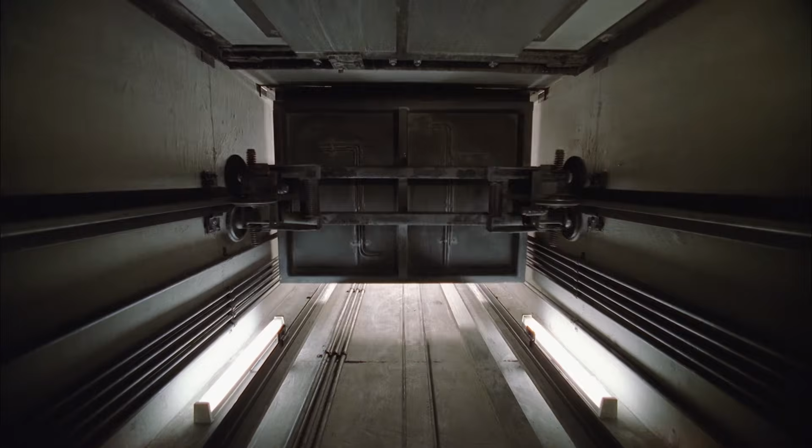But if the sky is the next frontier for human life, this raises a crucial question. Are tall buildings as safe as they could be? And if not, oh my God, how can we make them safer? Right there. There have been horrific blazes in tall buildings here and across the globe. When there's a fire, one thing that unites rich and poor, they all die the same way.

Outside the U.S., earthquakes have felled tall buildings and killed indiscriminately. Could cities like San Francisco be next? It's not if, it's when. Shut off the gas! Shut off electricity! And some tall buildings may go down. That is what our modeling tells us.

Can the latest generation of tall buildings meet these and other challenges, even as we build more of them? Skyscrapers today, especially the tallest ones, are very safe buildings. But mistakes can still happen. Downtown high-rise sunk 16 inches.

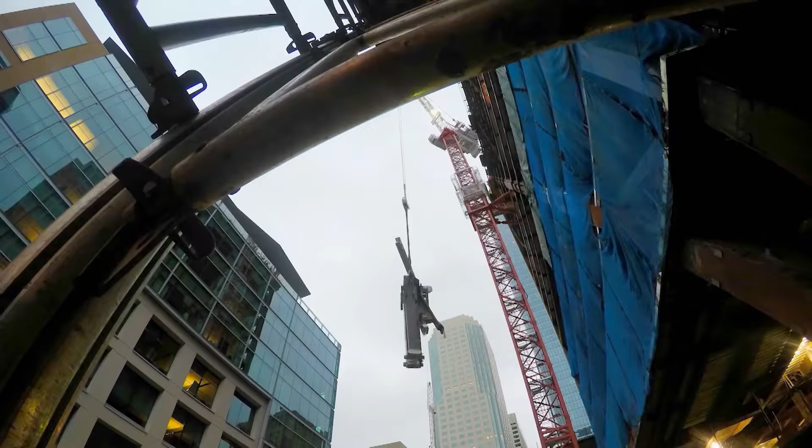And beyond making them safer, is anyone making them more appealing? We want a different model for organizing office buildings with constant movement, flow, and interaction. It's just an amazing building. Few structures in the modern era have had a greater impact on the way we live or work. And now the question is, can we make them even better? High risk, high rise, right now on Nova.

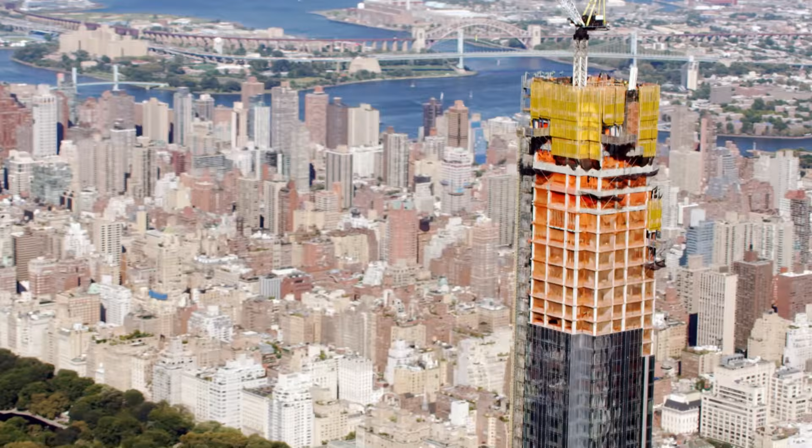Skyscrapers are among humankind's most awesome and extravagant achievements. Engineering marvels so tall and strong, their very existence seems to defy the laws of physics. The most daring skyscrapers are essentially showpieces designed to attract elite businesses or wealthy homeowners. Architecturally, these tallest of the tall exhibit the extreme of what is possible.

But it is tall buildings of all sizes that are today filling many of the world's cities. And for good reason. United Nations statistics show that there are almost 200,000 people urbanizing on this planet every day. And the only true way to address it is going up in height. If you build taller, you could pack more people onto the same address.

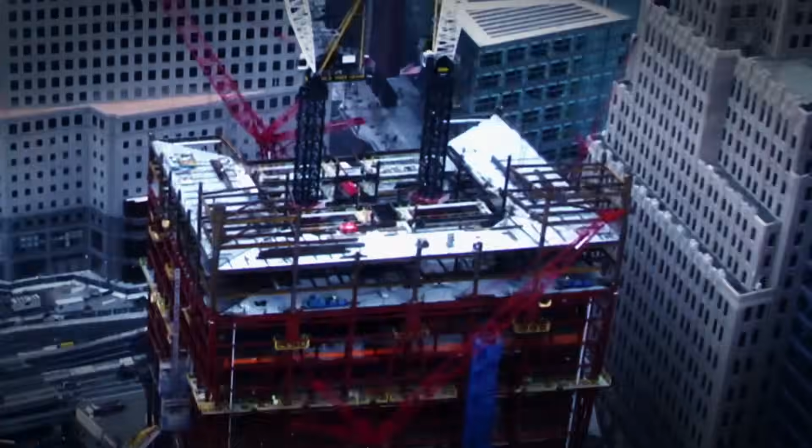Without tall buildings, it would have been virtually impossible to accommodate urban population surges in Asia and the Middle East. You see in countries like China and India, cities which have gone from 2 million to 20 million in one generation. And so that certainly generates a need for building stock to house that density. In the U.S., the pressure to build tall is centered in cities benefiting from the uptick in the global economy.

But as most major cities become crammed cheek to jowl with tall buildings, as we spend more of our lives looking down on the world below, will we begin to lose our sense of place, of neighborhood, of community? Or can tall buildings begin to embrace a more humanistic vision, one that stresses livability, interactivity, and eco-responsibility? Some designers are certainly trying new ideas.

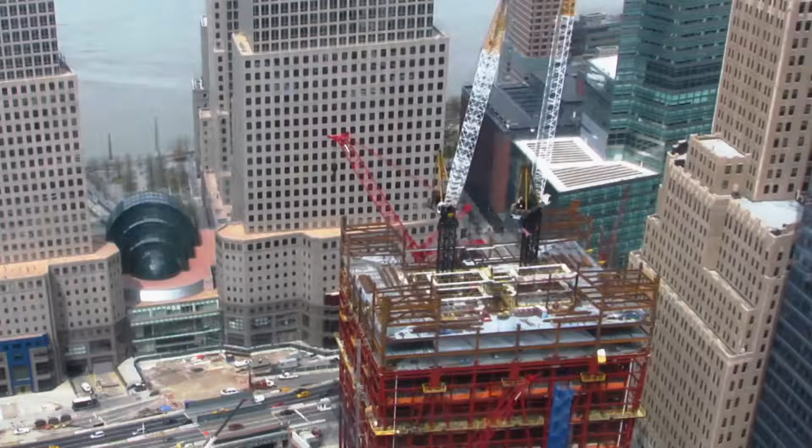But as we build skyward at a staggering rate, there's a more basic question. What have we learned over the decades about making tall buildings as safe as they can be? Can we ultimately trust them with our lives? Many American cities are identified by their iconic skylines, and seeing new skyscrapers join older ones seemed inevitable, right up to 9/11. After 9/11, most people said this is the end of the skyscraper, that people will be too afraid to live in them.

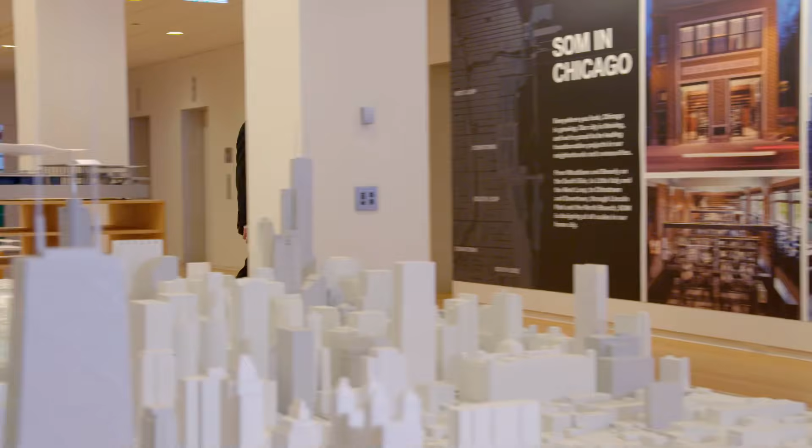They'll be too afraid to work in them. Certainly many people in the profession believe that it'd be the death of the tall building. Even Bill Baker, one of the world's foremost tall building engineers, had his doubts. I thought that my specialty was over, that it was going to be the end of tall buildings. And then, quite remarkably, soon thereafter, I was designing the world's tallest building.

That building is the Burj Khalifa in Dubai, largest city in the United Arab Emirates. As the world's economy began to rebound after the financial crisis of 2008, the drive to build tall in wealthy urban centers became a global trend.

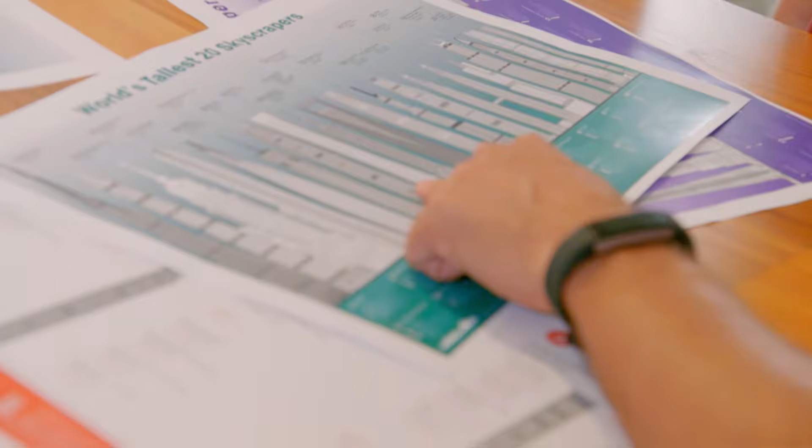Let's be clear on this, there's been an explosion of the number of tall buildings around the whole world being built. Anthony Wood heads the Council on Tall Buildings and Urban Habitat. They showed tallest 20 in 2020, which we did about 6 years ago. The organization charts the rise in tall building construction and classifies the world's tallest skyscrapers in 3 categories.

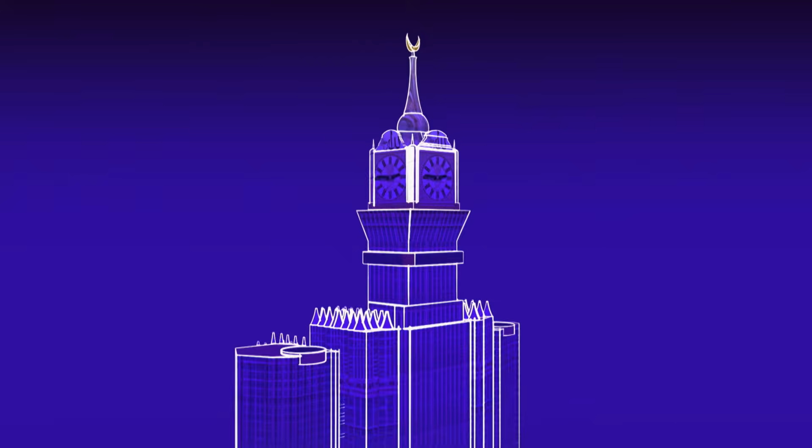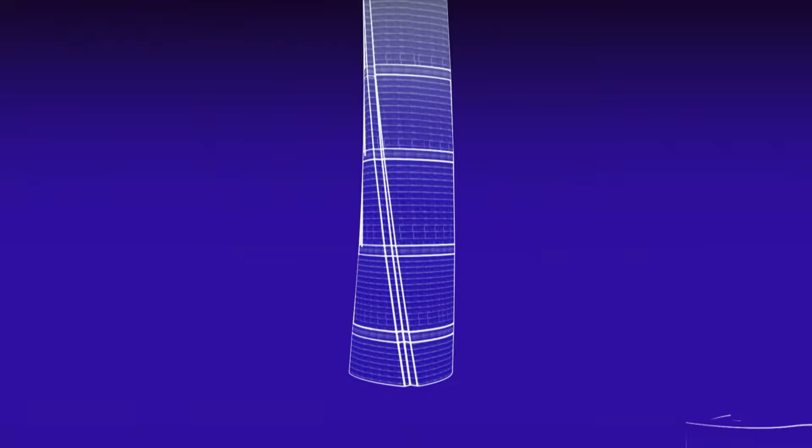There's plain tall, up to about 1,000 feet or the size of New York's Chrysler Building. Super tall, buildings over 1,000 feet. And mega tall, buildings over 2,000 feet or the size of the Mecca, Saudi Arabia clock tower. As of 2020, there are only 2 other mega talls, the Shanghai Tower at 2,073 feet and Dubai's Burj Khalifa at a staggering 2,700 feet. That's more than twice as tall as the Empire State Building.

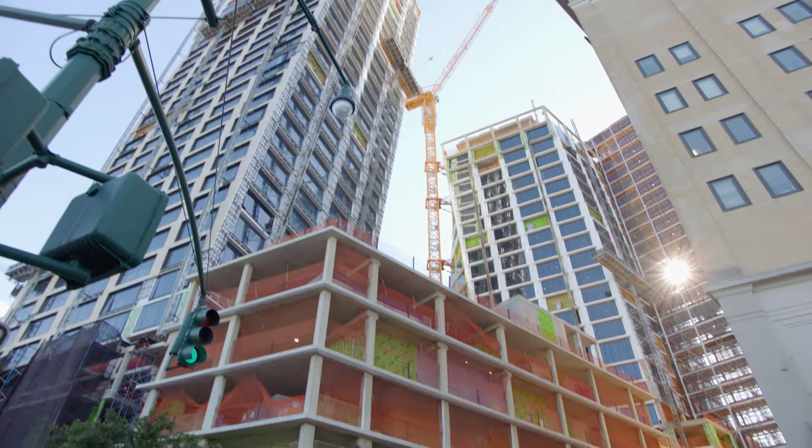I often get asked, what are the biggest barriers to how tall we can go? And there's only one barrier, and it's not technological. It's financial. It's who is gonna pay for it. Some of the very tallest buildings are designed to bring tourists and prestige to the cities they tower over. But most building owners aren't seeking height records. They're seeking profits. To build the tallest building in the world is not necessarily to build the world's most profitable building. That tall buildings can be good investments is evidenced by the number of cranes sprouting up in many major cities.

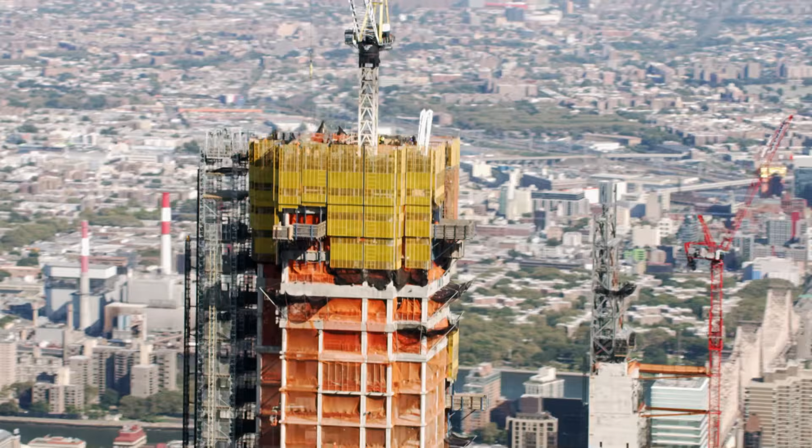Their proliferation also seems to indicate that few people question tall building safety or think twice about living or working in one. And for the most part, tall buildings do have stellar safety records. But engineers and designers are not infallible. And some threats can be unpredictable and difficult to overcome, like fires. Although most fires occur in homes and low-rise apartment buildings, frightening skyscraper fires do happen, as recent blazes in China and Dubai so clearly demonstrate.

In the U.S., fire started on the 12th floor of the Interstate Bank Tower. Huge multi-story skyscraper blazes are fairly rare. But fires in mid-sized buildings, especially older apartment-type blocks lacking basic fire safety requirements, are an ongoing concern. An egregious recent example of this problem occurred overseas at the 24-story Grenfell Tower in London. The fire started in a kitchen where flames shot out a window, igniting the building's highly flammable exterior wall covering, or cladding. Because of this danger, flammable cladding is prohibited in the US, but not at the time in the UK.

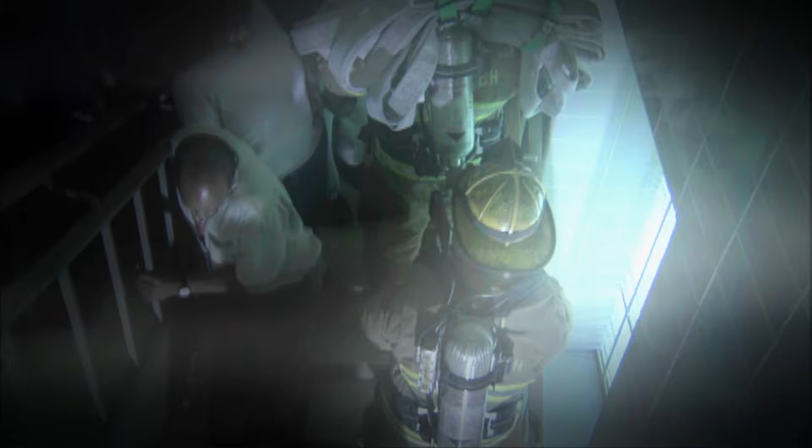And many stairwells are narrow, creating a dangerous bottleneck for firefighters trying to reach and control the blaze. We do have some narrow stairways, so either the people coming down are going to get held up or the firefighters going up are going to be slowed down.

Adding to this challenge is how to get elderly or disabled people down to safety. That becomes a problem if we have to take them down. That's very intensive to move somebody down the stairs. And that's why our best advice is we want them to shelter in place in their apartments.

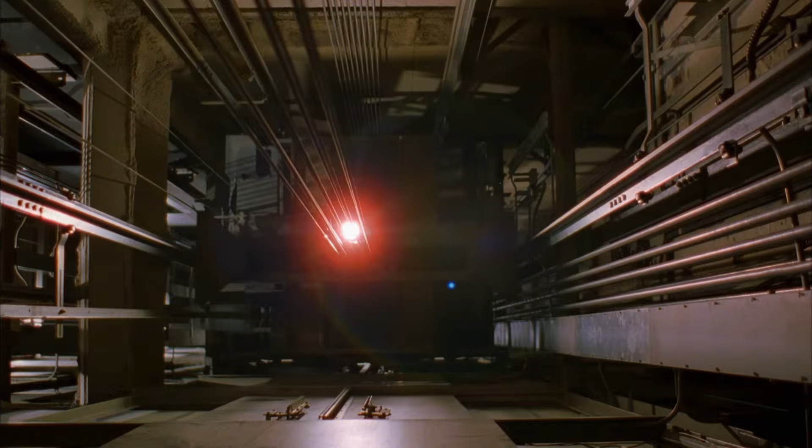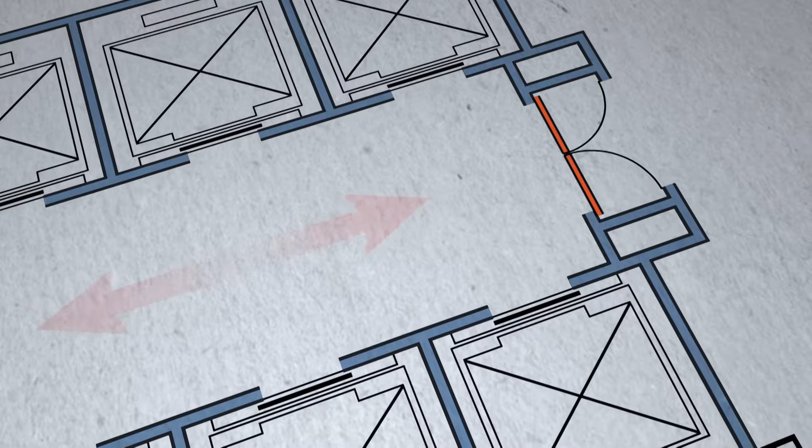Elevators could help, but they can spread fire or smoke, and people can get trapped inside. So occupants are generally restricted from using them. A new generation of fire-safe elevators is starting to come online, and these would certainly help the aged or disabled. They are housed in special closed-door areas, pressurized to keep smoke out, and there are drains to keep water out.

They hold great promise. But there are so few operating in the U.S., they have yet to be fully fire-tested. So we don't know the effectiveness of those elevators until they're actually used in an emergency situation. But there is a proven technology that can avoid the need for elevators by keeping most fires from spreading.

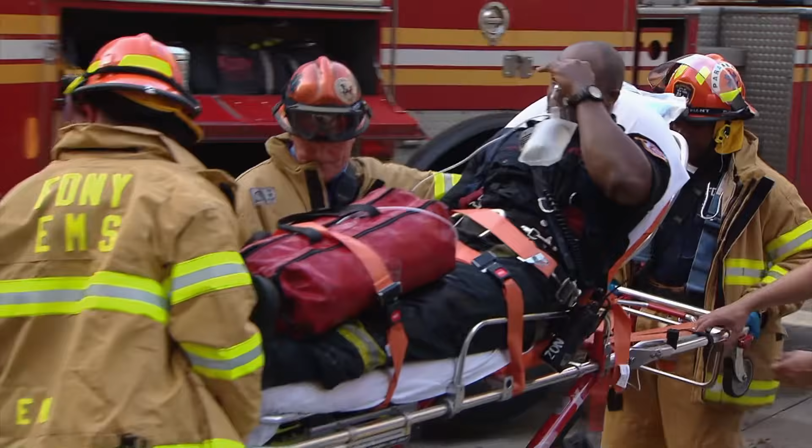That sprinklers have the capacity to save lives and buildings has been proven time and again, even at high-profile addresses. A recent fire in Trump Tower, New York, built before sprinklers became mandatory there, resulted in the death of a resident and several injured firefighters. Sprinklers could have prevented these casualties. So why don't more buildings have them?

And the reason we don't have sprinklers in all tall buildings is because the real estate industry doesn't want to spend the money to put them in. The good news is, sprinklers are now mandatory in most recently built tall buildings. And these have helped keep fires and fire-related fatalities on the decline.

But fires aren't the only threats to tall buildings and their occupants. Despite a mostly excellent safety record, (Everyone get back, get back!) engineering or construction mistakes do happen. (Oh my God.) And when they do, the results can be terrifying.

This is San Francisco's Millennium Tower, a 58-story luxury condominium that became a much sought-after address when it first opened about a decade ago. But in 2016, the news broke that it was sinking and tilting. This 58-story downtown high-rise unexpectedly sunk 16 inches. This golf ball rolling down the uneven floor toward the direction the building is leaning.

The revelation came as a shock to condo owners. The building was still settling vertically and horizontally, and it was unclear when that would stop. Some people, I think, just left. There was a concern that the building was about to topple over. And in a city with a history of earthquakes, this was especially worrisome. Today, the so-called Leaning Tower of San Francisco has sunk about 18 inches on its northwest corner.

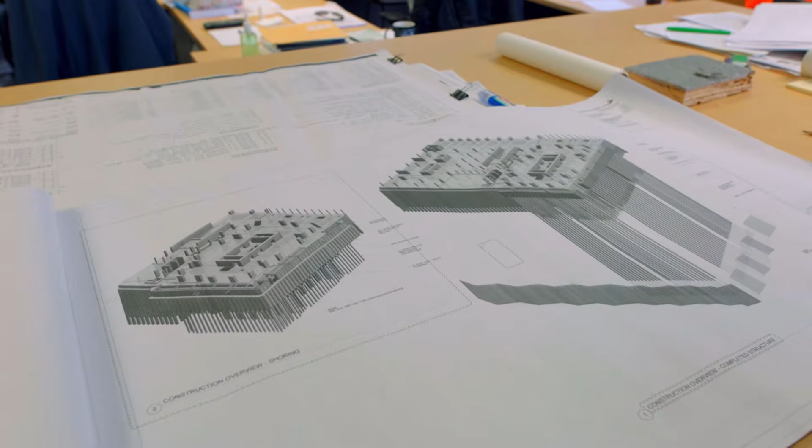When the news broke, Ron Hamburger, a veteran structural engineer, was hired by the building's developers to find out why the Millennium was sinking and if it could be stopped. The Millennium Tower basically is sinking because it's a taller building and a heavier building than most of the other buildings that have been constructed in San Francisco. It imposed greater weight on the sand layer that exists about 80 feet below the sidewalk.

Like many cities bordering water, San Francisco rests atop ancient layers of soft sand and clay. Whereas in New York, a hard bedrock-type layer called schist lies close to the surface in many places, so anchoring tall buildings here is ideal. But in San Francisco, bedrock lies deep below the surface, and reaching it with supporting piles is difficult and expensive. So tall buildings are often placed on concrete mats with piles that don't go to bedrock.

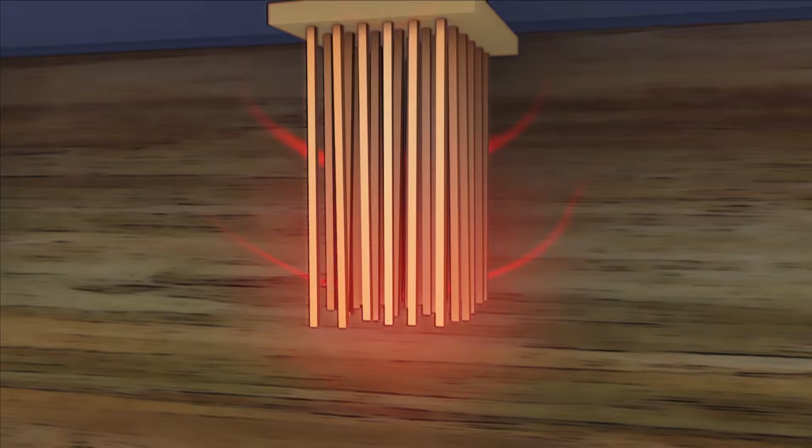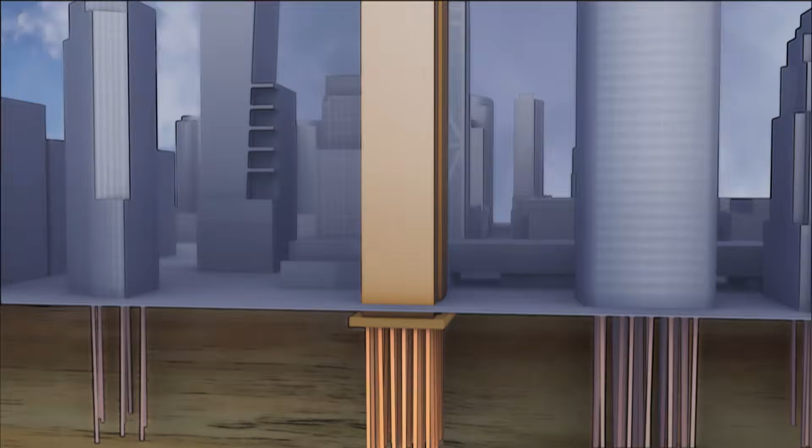But the piles do transmit the building's weight through the weak upper soil layers to deeper, firmer layers, and the system normally works quite well. But for some reason, the Millennium's extreme weight pushed down with enough force to compress the soil under some of the piles, causing the building to settle unevenly.

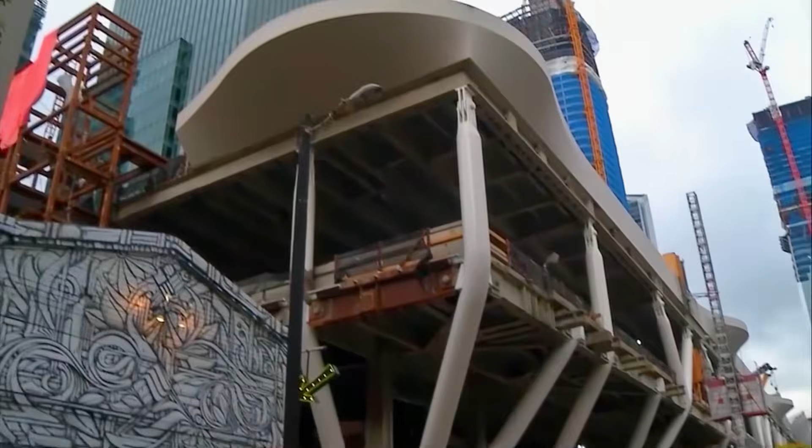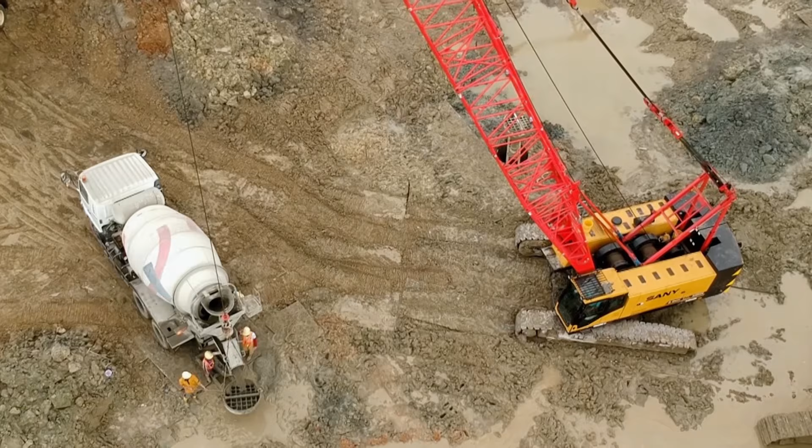The tower's owners claim a neighboring construction project called the Trans-Bay Terminal contributed to the uneven settling by dewatering the soil under the Millennium. The dewatering is done in order to have a dry excavation so that you can actually build what you want to build. Whether the fault was dewatering or poor engineering, the sinking has slowed to about 1/4 inch a year and could stop entirely.

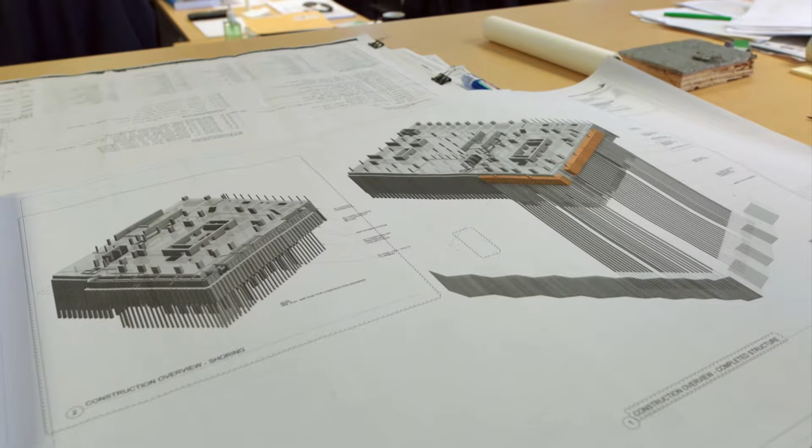Regardless, Ron Hamburger is now heading up a multi-million-dollar foundation fix that will shore up the building by extending the concrete foundation mat on the sinking corner and adding additional supporting piles that go all the way to bedrock. It is hoped that the fix will allay public fears about the building's stability.

The Millennium Saga stands out in part because serious mistakes in high-profile buildings are rare. Their engineers have consistently produced structures that stand straight, can support their own weight, and are capable of resisting a constant threat to any tall building: the force of the wind.

Although no tall buildings of note have ever been blown over, another famous mistake almost brought that frightening prospect to New York. When it was completed in 1977, the now modest 59-story Citicorp Center was the 7th tallest building in the world. With its aluminum and glass exterior, Citicorp was among a new generation of lighter skyscrapers that avoided the expense of heavier masonry-clad facades, like the Empire State Building.

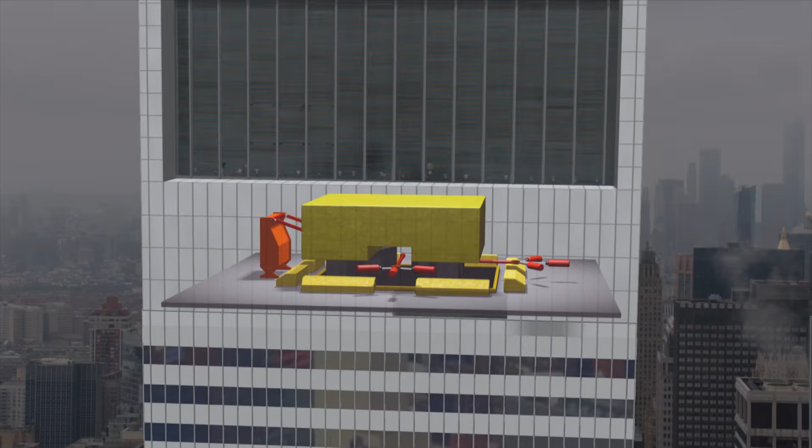But lighter buildings can sway in the wind, and when they do, people inside often complain about feeling motion sickness. To counter the sway at Citicorp, the building's engineer, William LeMessurier, had New York's first tuned mass damper installed near the top of the building. It is basically a 400-ton block of concrete that slides on a bed of oil.

When wind pushes against the outside of the building, the giant block will slide in the direction of the sway. Large piston-like devices restrain the block, absorbing the energy and slowing its movement. This makes the block lag behind the moving building, which in effect counters the sway and keeps the building steady.

Without dampers, tall buildings like these beanstalk-thin luxury condos could be fairly uncomfortable to live in. The building can't have the reputation of having the kind of proverbial waves in the toilet where you can feel the building moving, because people then feel uncomfortable. They won't buy an apartment where they feel vulnerable.

Back at Citicorp, the resourceful LeMessurier solved another problem. He raised the building above the street and placed its 4 major support columns under its sides, rather than at the corners, as is typical. He did this to accommodate a church. Not this modern one, but an older one that had become dilapidated. So the church struck a deal. They would get a new building in exchange for letting Citicorp rise above it.

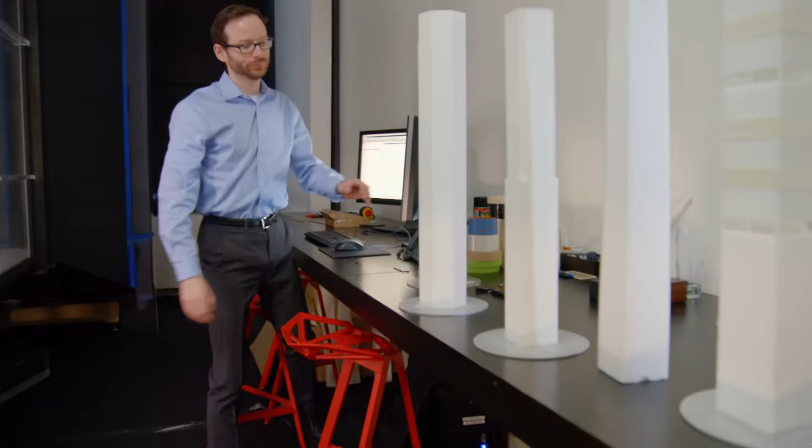Engineers wind test building models to see, among other things, if their shape produces a dangerous phenomenon called a vortex. The model is bolted to a base that contains sensors underneath, and when the fans come on, the sensors measure the model's response to the air flowing around it. One of the issues with tall buildings is called vortex shedding. As wind goes past an object, it'll go first to one side and then the other. And when it does this, it'll create little swirls in the air.

Vortex shedding creates whirlpools that lower the air pressure behind a building. Now, when the wind hits the building, it can push it and make it sway rhythmically, like a child on a swing. At first, they kick their feet just randomly and the swing goes nowhere. You have to teach them that they have to kick their feet at the natural harmonics of the swing. So in a tall building, it's the same thing.

Buildings that gain momentum like a swing put dangerous pressure on structural connections. But changing the building's shape can disrupt wind forces and stop the buildup of vortices. Sometimes a very small change can be the difference between a building being successful or not successful.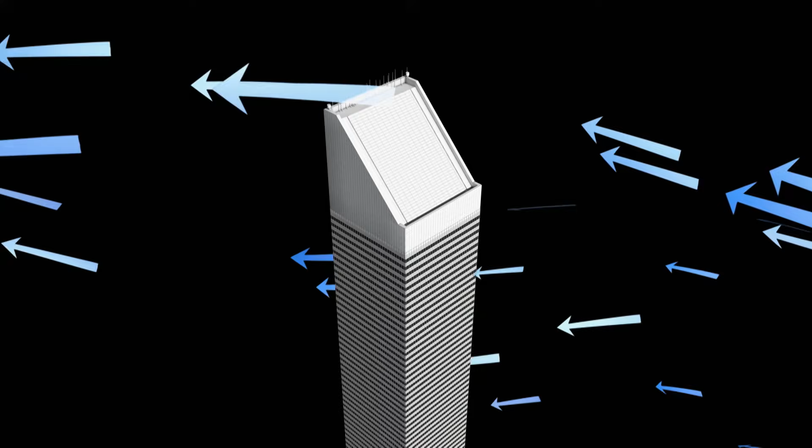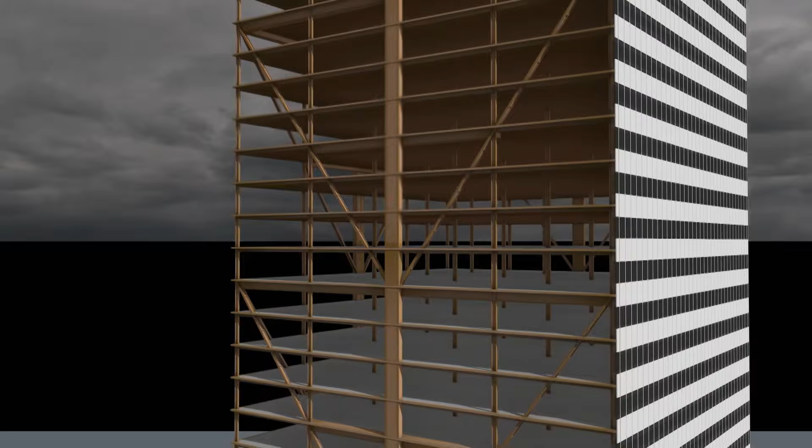Citicorp passed its wind tests, but about a year after it was occupied, LeMessurier discovered that winds striking the building diagonally, rather than face on, could increase the stress on some of the V-braces by 40% or more. Then he realized that during construction, his office had permitted contractors to bolt the braces together instead of welding them, as he had originally specified.

He calculated that winds in excess of 70 miles per hour, striking the corners of the building, could sever the bolted connections. I came to the conclusion that a storm which had a probability of occurring once in 16 years would cause the building to fail and collapse. I can't live with that. LeMessurier recommended welding 6-foot-long steel plates on either side of the bolted connections to strengthen them. This would certainly solve the problem, but would take weeks to finish.

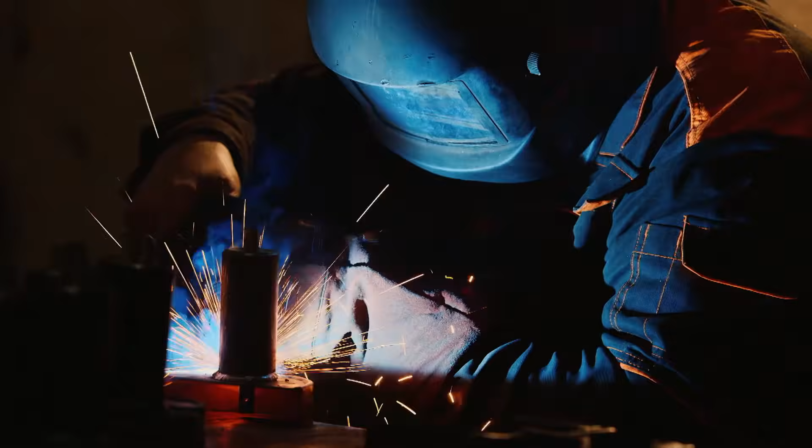So as workmen began the arduous task, folks, get on the sidewalk, please. The city drew up emergency evacuation plans. Not only would they evacuate the building, but they would evacuate a 10-square block area around the building just in case the building falls over. Can you imagine?

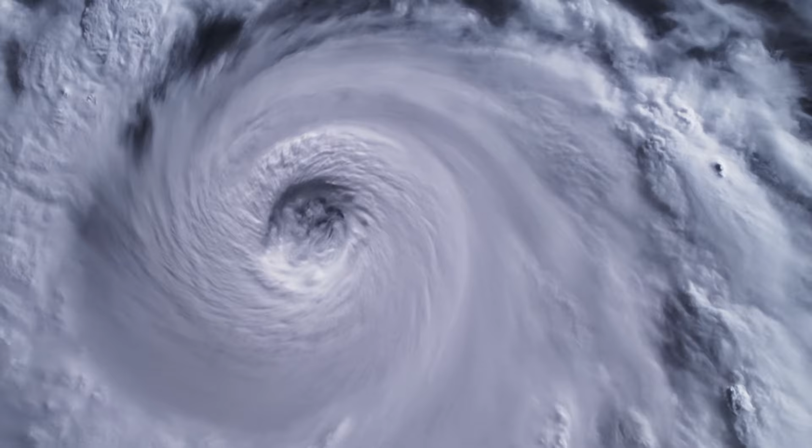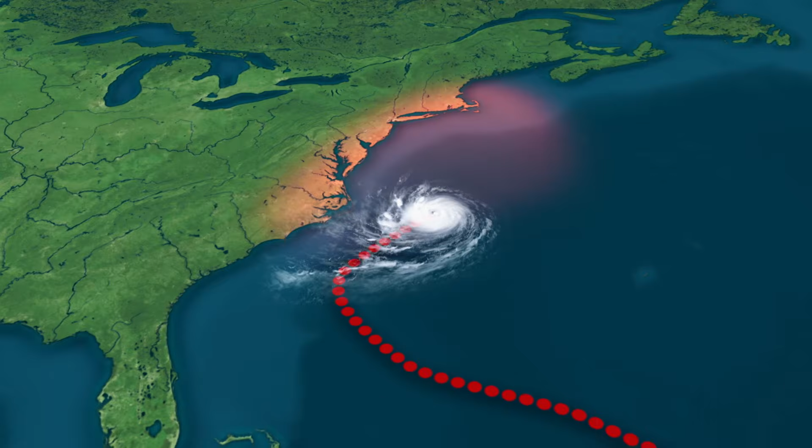And as fate would have it, in late August 1978, Hurricane Ella began heading for New York. As its winds intensified to over 100 miles per hour, the disaster LeMessurier feared loomed closer, and there was no way repairs could be completed in time. But instead of tracking toward the city, Ella veered out to sea. It all ultimately worked out, but it was a very dangerous situation.

Despite the travails of Citicorp, tall buildings have proven time and again that they can successfully withstand the most extreme weather conditions. And they are also engineered to withstand another major force of nature. But when it comes to earthquakes, the prospects that some tall buildings may not survive is a very real probability indeed.

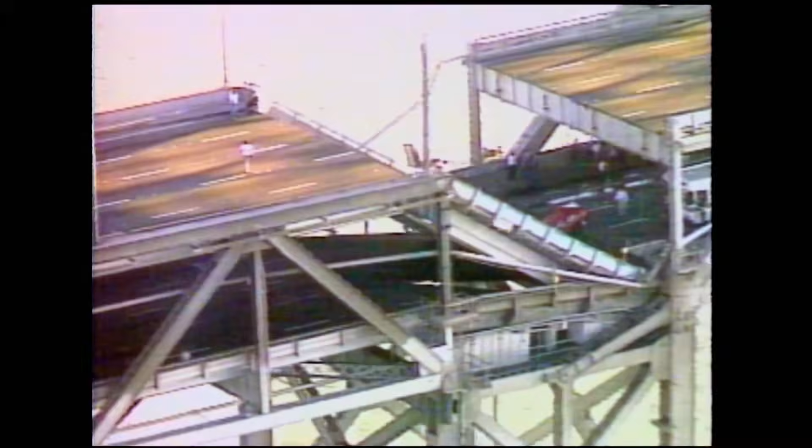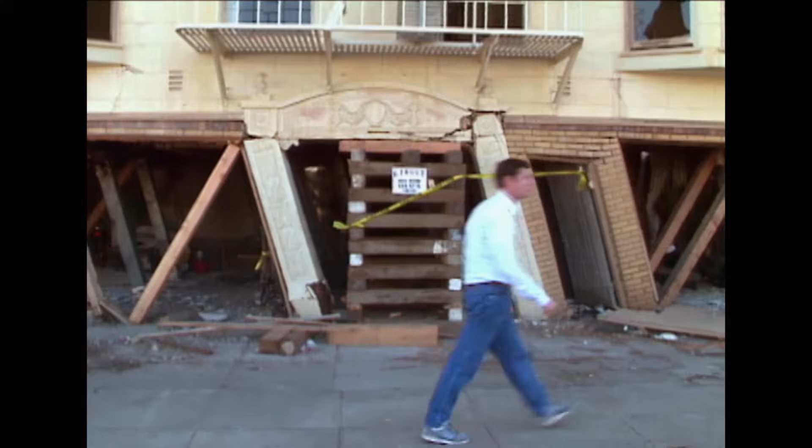It's been over 30 years since the 1989 Loma Prieta earthquake in San Francisco. Shut off the gas! Shut off electricity! Store water! The quake caused major damage to houses and infrastructure near the bay. But the rest of the city, including tall buildings downtown, escaped relatively unscathed. That's because the quake originated 60 miles from the city, and more importantly, was not another big one.

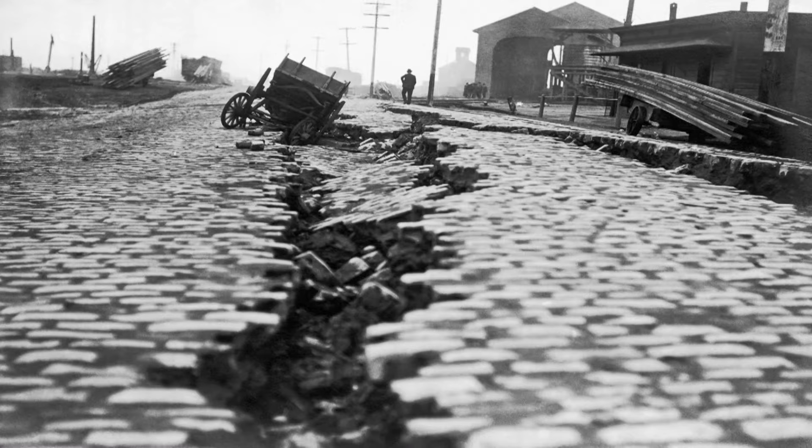In 1906, a giant earthquake on the San Andreas Fault and devastating fires that ensued basically destroyed the city. The U.S. Geological Survey now says there's a 70% chance another powerful quake will strike the region sometime within the next 30 years. The earthquake could occur now, it could occur in 20 years, but it's not going to wait 100 years. There are 7 major faults in the Bay Area, with the most worrisome being San Andreas and the Hayward.

We're in a parking lot south of downtown Hayward, California. You can see donuts, tire tracks that kids have made. David Schwartz, a recently retired USGS seismologist, has studied the Hayward Fault for years. And as you're crossing the parking lot, you look down and you see the asphalt is sort of disturbed. There's a little step across it here. There's a whole series of cracks here. This is the Hayward Fault.

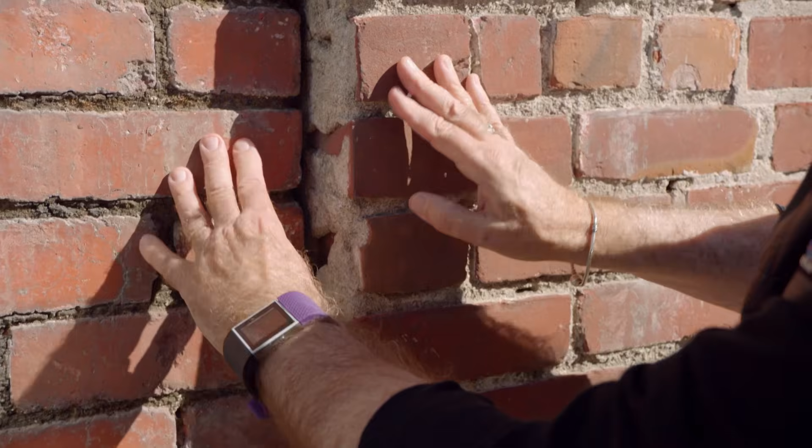And the fault is creeping. It's actually moving slowly all the time. And it produces this type of feature. When you come to here, these older buildings, this separation expresses creep along the fault. This building is moving towards me. This building is moving away. When the fault finally decides to move in its big earthquake, I really wouldn't want to be standing against one of these buildings. In the end, the fault always wins.

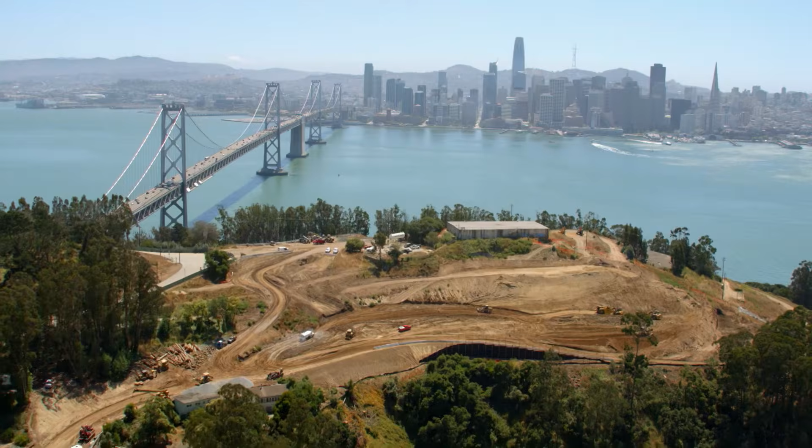The fault travels northwest from the town of Hayward, through Oakland and the Berkeley Hills, where millions of people live on or right next to it. And the force of a big quake could readily travel across the bay, smack into downtown San Francisco, bringing with it the potential for a major disaster. And when this earthquake strikes, it's pretty clear what types of buildings would likely suffer the most damage.

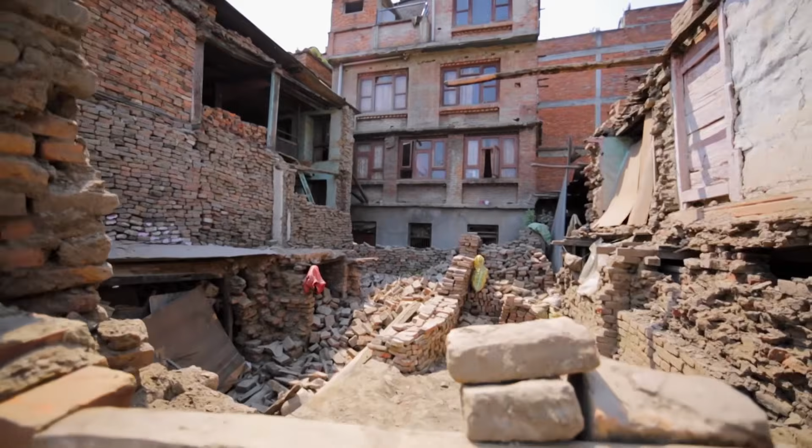The worst performing buildings are what we call unreinforced masonry buildings. These are typically either common red brick buildings or sometimes stone buildings. The masonry is quite strong, but it's also very brittle. And under the effects of severe ground shaking, the masonry will crack and crumble. And it's very common actually for the walls to fall away, creating not only a hazard for people in the building, but also people outside the building.

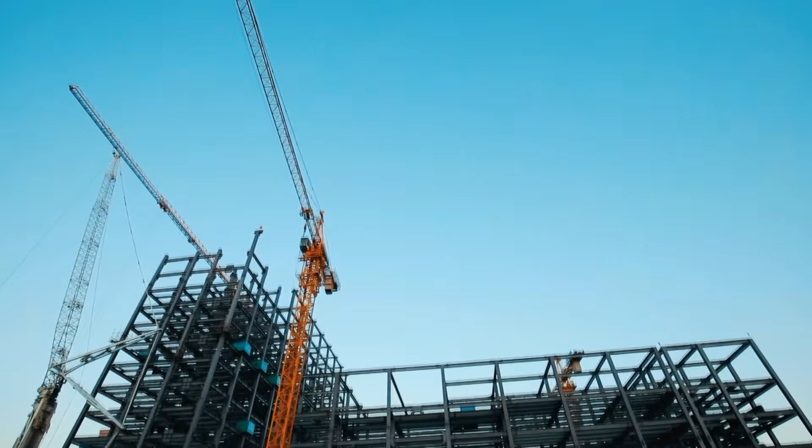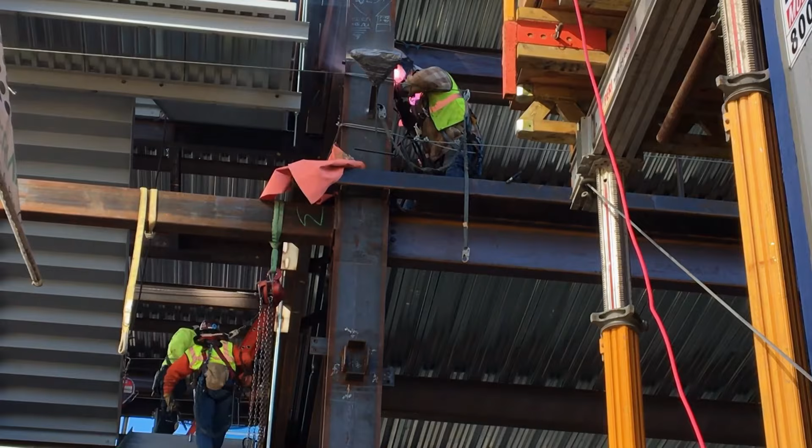Because masonry buildings could be vulnerable to collapse, it was deemed safer to construct tall buildings with steel frames. Steel seemed like the perfect choice because if you push on steel way beyond its strength, the steel bends instead of breaking, and therefore you wouldn't collapse the building. And by the 1960s, the preferred method for joining the pieces in a steel frame was to weld them together. What engineers call welded steel moment frames were deemed one of the safest designs for tall buildings in California.

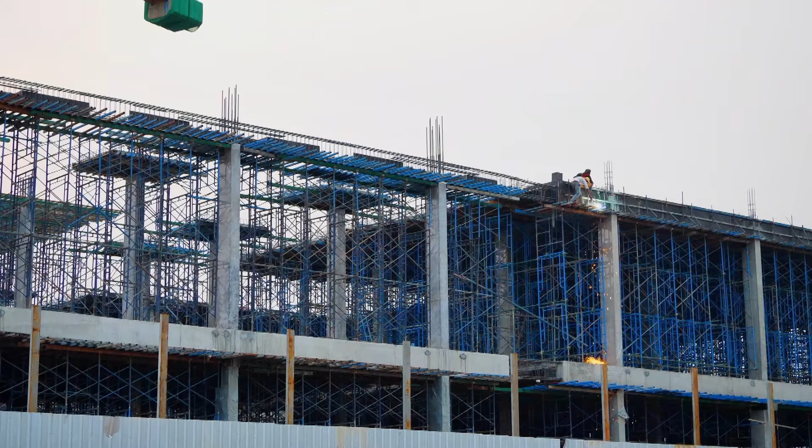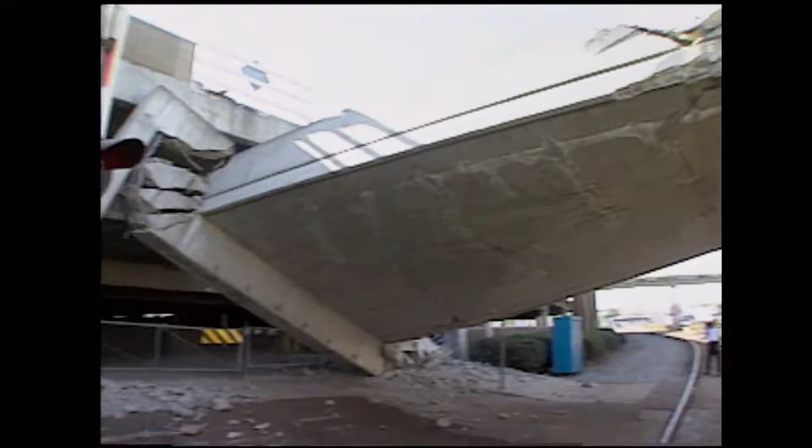That thinking would get a severe jolt after the 1994 Northridge earthquake. You can see extensive damage here. The 6.7 temblor struck densely populated suburban Los Angeles, causing scores of deaths and property losses in the billions. It also revealed a serious flaw in supposedly safer moment frame buildings.

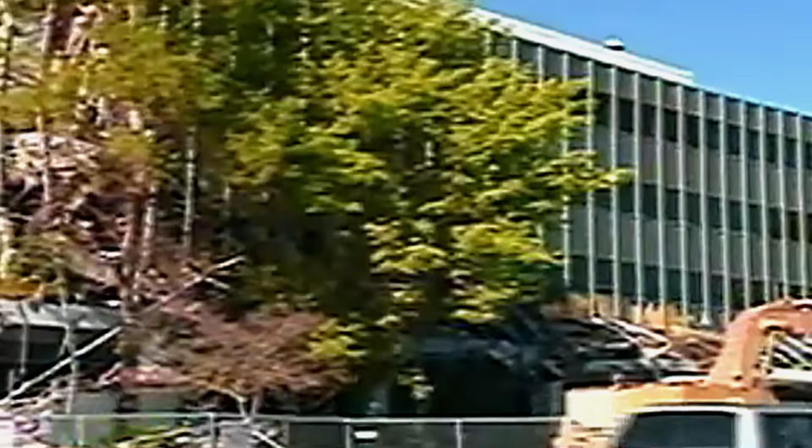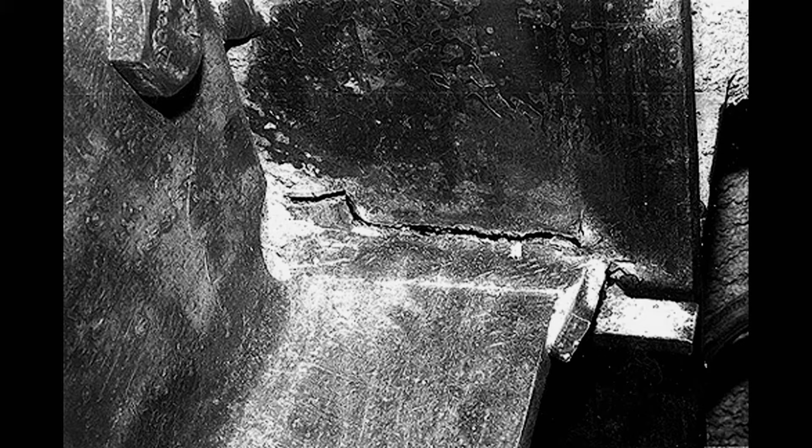When the Northridge earthquake occurred, a number of these buildings experienced unanticipated fractures, cracking of the steel connections between the beams and the columns. Outside, most of the buildings looked stable. But inside, inspectors found weld failures and cracks in the steel. Now the question was, what could happen to these steel frame buildings in an even stronger earthquake?

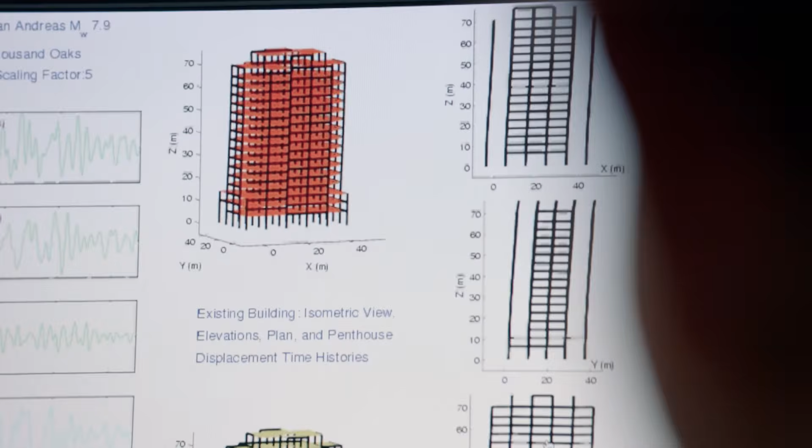Swaminathan Krishnan is a structural engineer specializing in computer simulations. After Northridge, he modeled a specific moment frame building damaged in that quake and subjected it to the force of a stronger San Andreas earthquake. In particular, we wanted to see whether this building would remain standing or would it collapse.

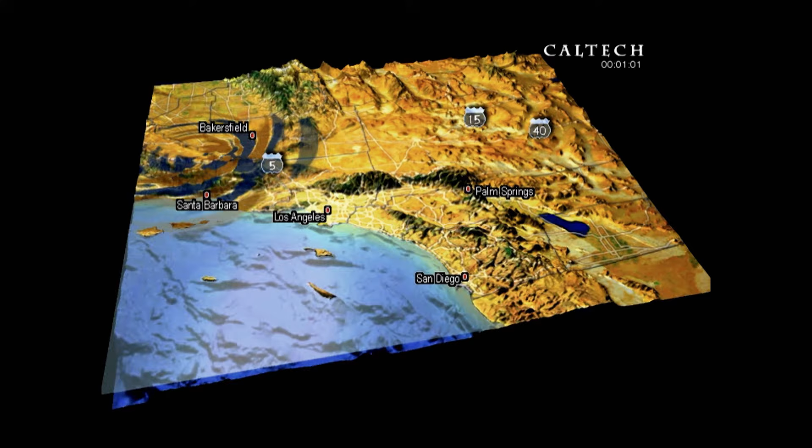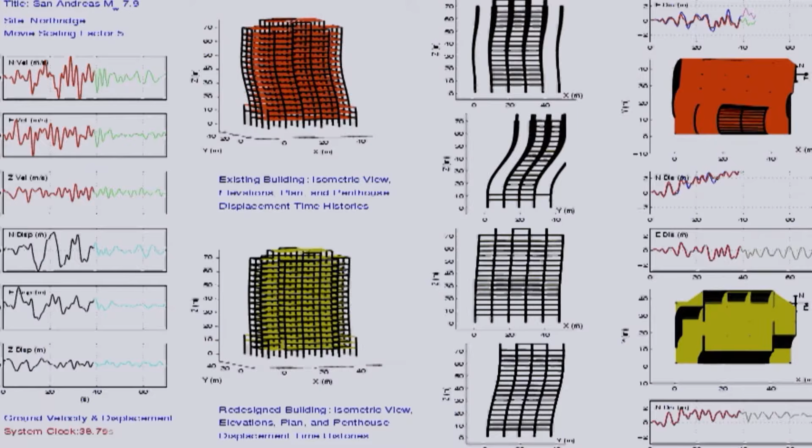As the big quake begins to spread, his program assesses its effect on the building's frame. This building does fine for a while. You can see that it's going back and forth and it's coming back and staying vertical. But at some point, there are several connections that break inside of the building and the building comes crashing down.

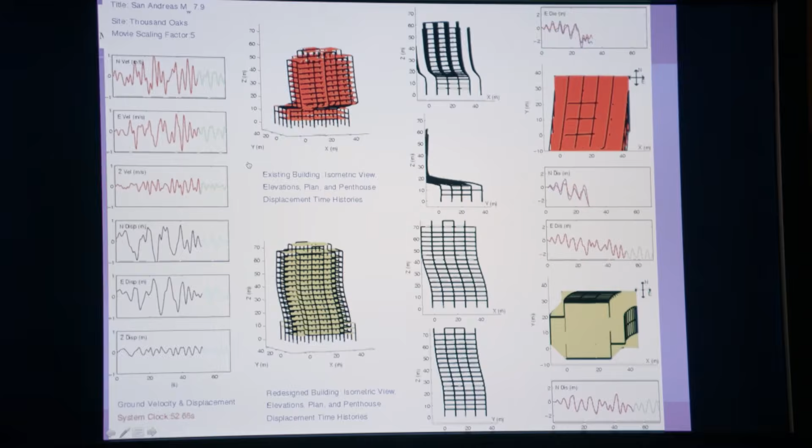Although improved materials and welding techniques have made newer steel buildings far less susceptible to failures, older moment frames, including the famous Transamerica Pyramid and other buildings throughout California, remain unfixed and could even have become weakened by previous quakes. So if a building goes through an earthquake, even if it is apparently undamaged, it's used up some of its original earthquake-resisting capability.

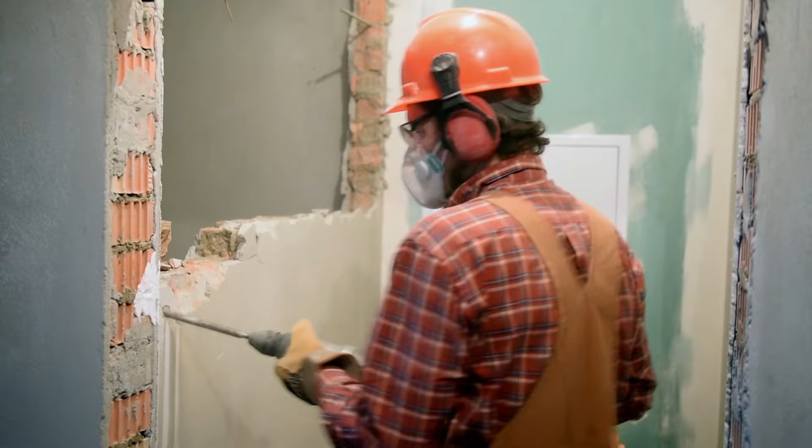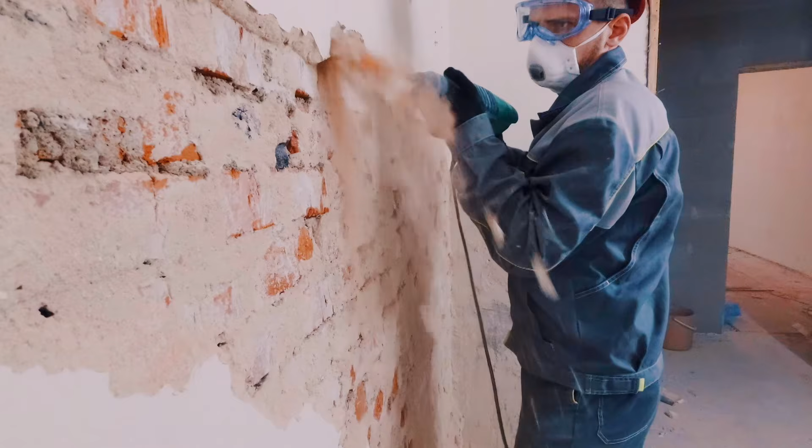In 1985, a powerful earthquake struck Mexico City, where taller buildings saw relatively little damage. But many mid-size, 10 to 20-story buildings were tremendously damaged or totally destroyed. That's because their particular height resonated with the shock waves from this earthquake.

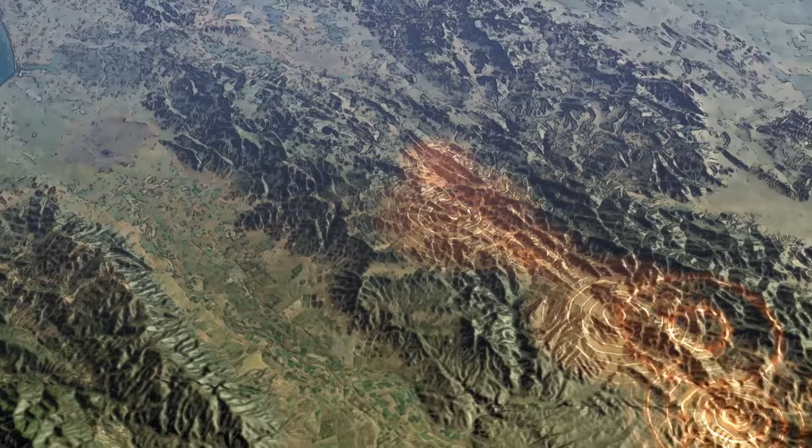Resonance is a phenomenon that occurs when the natural frequency of a structure closely matches the natural frequency of an exciting force. Earthquakes send out vibrations of various wavelengths or frequencies. When they reach a cluster of buildings, those that suffer damage are often the ones whose height best matches those particular frequencies.

When the ground shaking has in it high frequencies, meaning if the shaking is jarring, it's going to go do this, boom, boom, boom. That kind of shaking will selectively affect short buildings. Whereas longer wavelengths can cause tall buildings to sway rhythmically, and in extreme cases, can collapse them.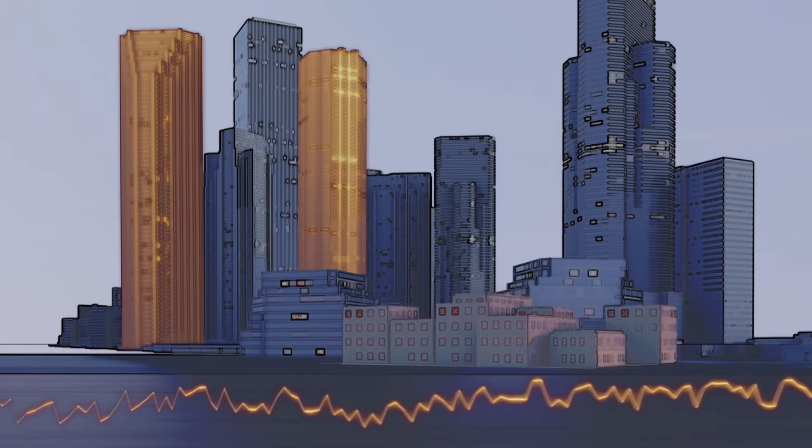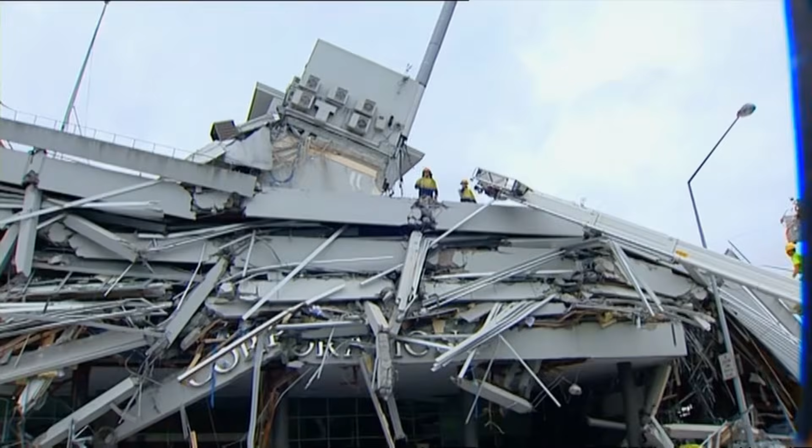Other factors, such as soil conditions or inadequate construction materials, can also make tall buildings vulnerable. But there's no factor more important to an earthquake's destructive potential than location. So absolutely, your distance from the fault is one of the most important things about what shaking you receive.

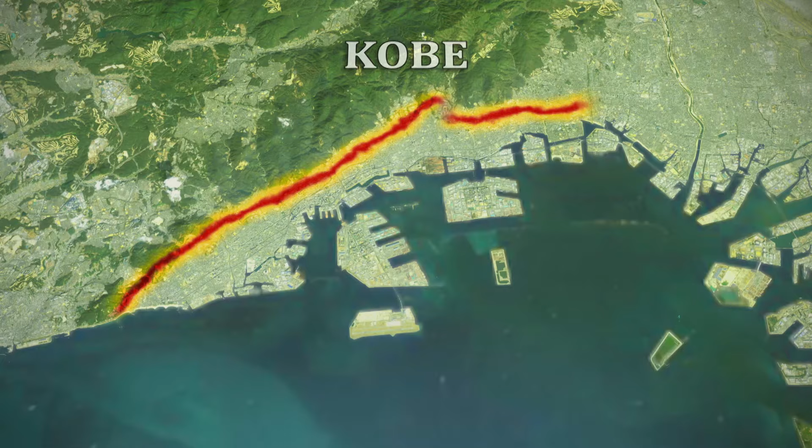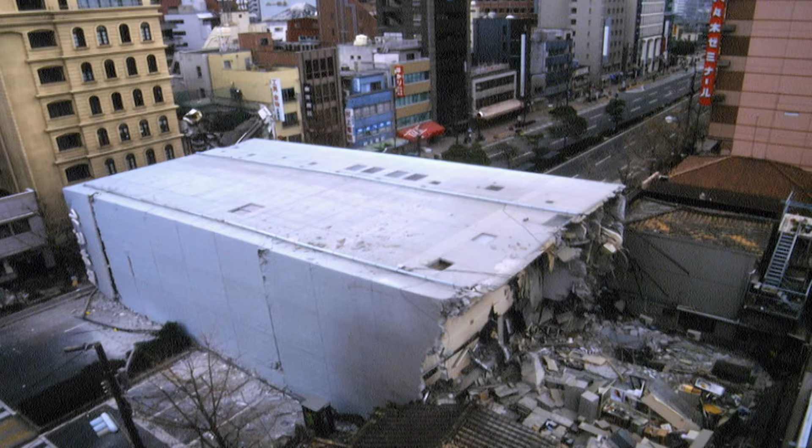In 1995, one of the most devastating earthquakes in the modern era struck Kobe, Japan, along a fault that lay close to the city. 6,000 people died, tens of thousands were left homeless, hundreds of thousands of buildings of all sizes were damaged or destroyed. There were collapse of buildings and there were collapse of steel frame buildings from the same problem with welds that we saw in the Northridge earthquake.

Kobe's proximity to a fault, as well as its large concentration of people and buildings, raises an obvious question. Could this be the fate that awaits cities like San Francisco? I think about risk for a living. Ibrahim Al-Mufti, Ibi to his friends, is a structural engineer who's worried about his city's fate.

You know, I walk to work through downtown every day, looking up at the buildings, and I know too much in a sense. It is definitely possible that a few buildings may come down in a big earthquake. Ibi's goal is to engineer a building that will be among the safest ever built, even reaching beyond standard building codes. The building code objective for many years has always been life safety, to protect it against full collapse.

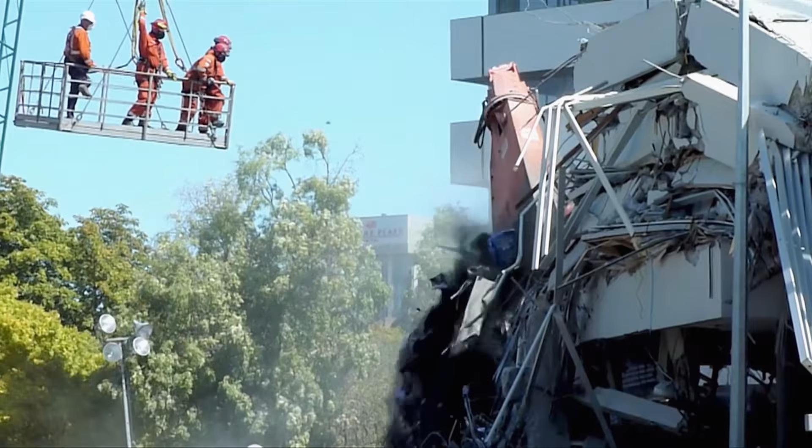Recent earthquakes in Christchurch, New Zealand, demonstrate the flaw in life safety codes. Many heavily impacted buildings did not collapse, and therefore saved lives. But most were so severely damaged, they could not be reoccupied and had to be torn down, which has depopulated the city and derailed it economically. And actually, Christchurch, you could argue, is still recovering from that earthquake 10 years ago.

And so I always ask the question, are we as engineers bringing our knowledge to bear on designing these buildings to be more resilient and allowing these cities to recover more quickly after big earthquakes? San Francisco City Administrator Naomi Kelly is hoping to make tall building resiliency one of the city's top priorities. Downtown San Francisco is our economic engine for the city. We have now 62 tall buildings. Many more people are living downtown.

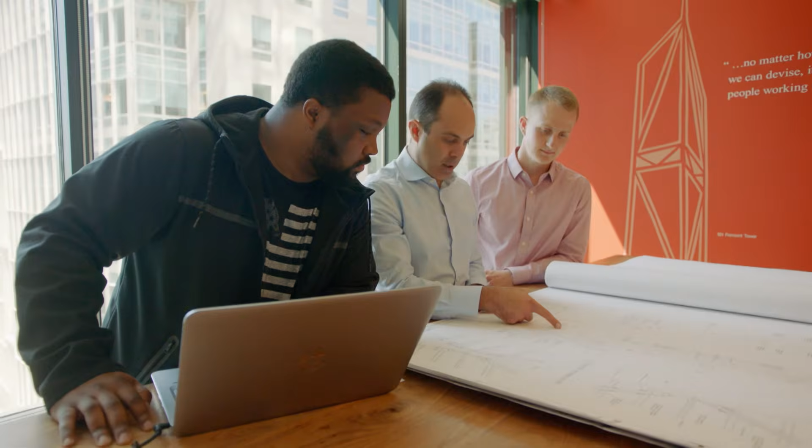And so we are now looking at not just the building codes where the building's good enough for you to get out the building, but how do we make our buildings more resilient, and how fast can we reoccupy those buildings? Most folks want to not only just survive the earthquake, but they want to get back into their home or office building as soon as possible. And that's exactly what Ibby and the engineering team for 181 Fremont set out to do. They're triangulating, right? All of those forces have to be.

Located near the Millennium and Salesforce Towers, 181 Fremont is 56 stories tall, slim, and angular. The visionary structure owes its design to Jeffrey Heller. As a young architect, Heller had gone to Armenia in 1988, where he saw firsthand the devastation inflicted by a huge earthquake. What really got me was the level of desolation and devastation. What we saw was in the town of Spitak, which was the epicenter of the earthquake, a city of 25,000 gone, nothing left.

Over the years, Heller designed several earthquake-resistant buildings, but 181 was for him the commission of a lifetime. The building had to be great, or at least the best I could do. 181 is 800 feet tall. 2/3 of it is office, about 45 floors. And then the top 1/3 is residential. The views from inside the upper floor apartments are nothing less than spectacular, as are the appointments in its luxurious penthouses.

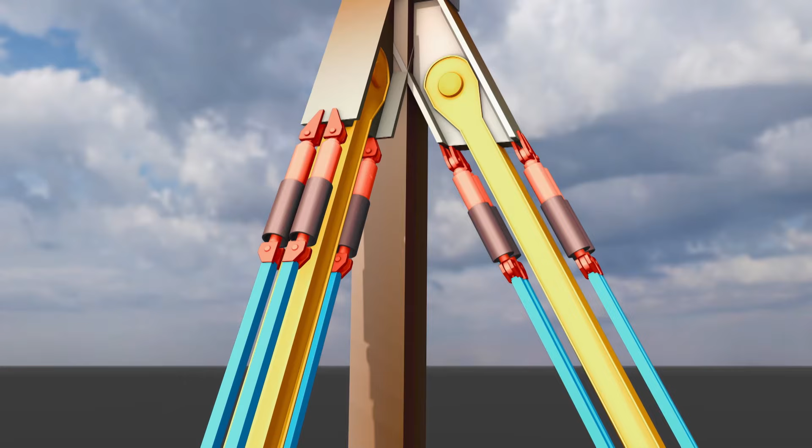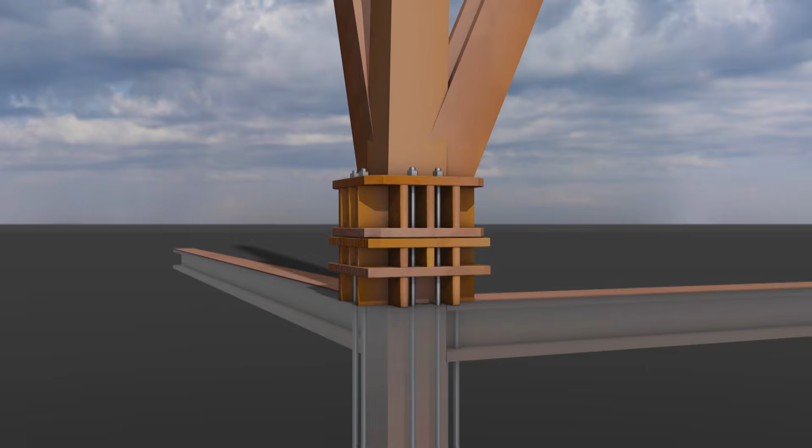As the building flexes, the middle brace stretches or shortens. When it does, secondary braces activate the dampers that compress and stretch like springs, absorbing energy and channeling the force of these movements to the main columns. At the base of the columns, we see they can lift up incrementally. So in an earthquake, the building acts, as Ibby notes, like a skier with ski poles. And so you've got these columns that are acting like ski poles in a sense, and some lift up, and you've got more pressure on this one to stabilize yourself, and as you go this way, same thing.

The overall design is so unique, it earned 181 a first. We actually received the world's first REDi Gold rating, which means that we've designed it in a certain way such that building occupants can get back and use the building almost immediately after a very big shake. This is something some seismic experts have been advocating for. We are trying to change the building code to say life safety is not enough. We need functional recovery, meaning I can recover the function of the building in a reasonable amount of time.

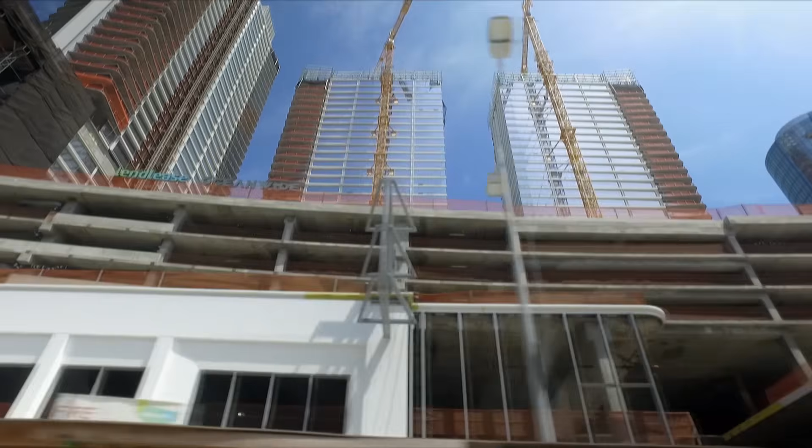But resiliency features like those on 181 can be expensive. So until they are mandated in building codes, getting developers to incorporate them may be a challenge. It would be wonderful if American building owners and developers wanted to provide society buildings that were more resilient. But for the present, it seems it will take government to force that. Or an earthquake. If we had a major earthquake and it caused catastrophic damage similar to what New Orleans saw in Katrina, that might be enough to change society's attitudes and foster an era when we do indeed develop more resilient construction.

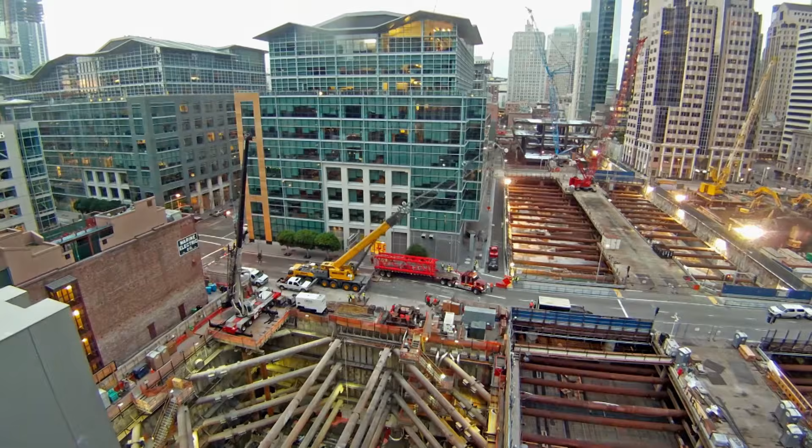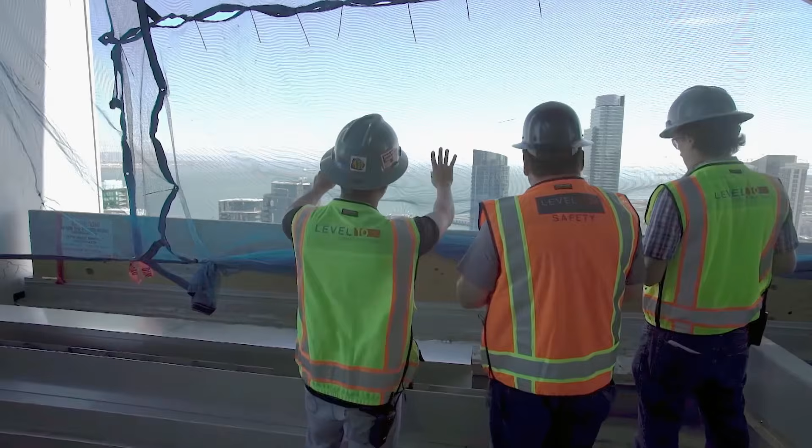If we have the will to apply lessons learned, tall buildings will continue to become better at withstanding earthquakes, wind, or fire. And this is certainly critical, since going up is just about the only solution to urban population density. But beside becoming safer, what else could tall buildings become? What other considerations might go into their planning and design?

For decades, visionary thinkers have proposed making tall buildings more like eco-friendly, vertical villages. Although some of these designs are, well, a little bizarre, they generally promote light-filled, open, communal spaces that can make buildings more people-friendly. And today, some designers are reaching for that vision with a less fantastic, but still vibrantly creative, tall building environment.

This bustling atrium is office central for Bloomberg LP, the global business, financial, and communications giant. The first thing you notice in this building is all the stairs, and people constantly on the move. The elevators stop on every floor only for disabled people. For everyone else, the elevators, in fact, only stop on 9 out of the 25 floors that we occupy. The stair-stepping helps promote employee fitness and is just one of the out-of-the-box concepts in this building's overall design.

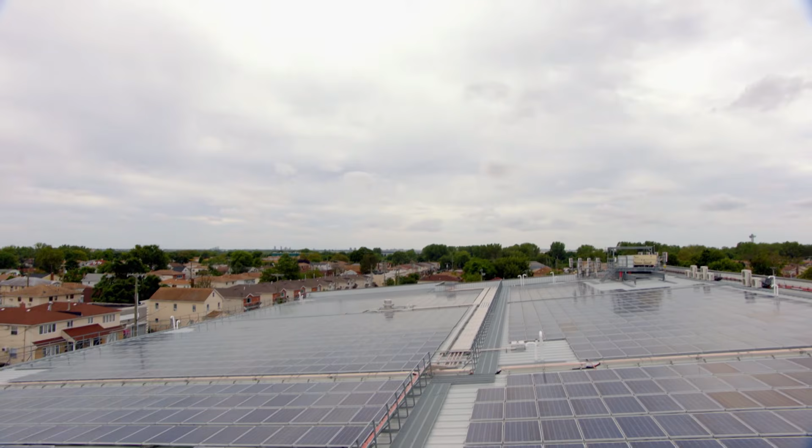And keeping with its Green Buildings initiative, near JFK Airport in Queens, the company has financed a solar array that generates over 1.5 million kilowatt-hours of sustainable energy a year. That's about 5% of its power use.

Many of the concepts, like encouraging bike riding, as well as the free snacks and open interior spaces, are not new. They're borrowed from Silicon Valley companies like Google. But these companies are in low-rise buildings, in roomy, open spaces. Whereas incorporating these design considerations in a tall building environment breaks the mold on how these buildings can be reimagined. The energy, the environment, it's just an amazing building.

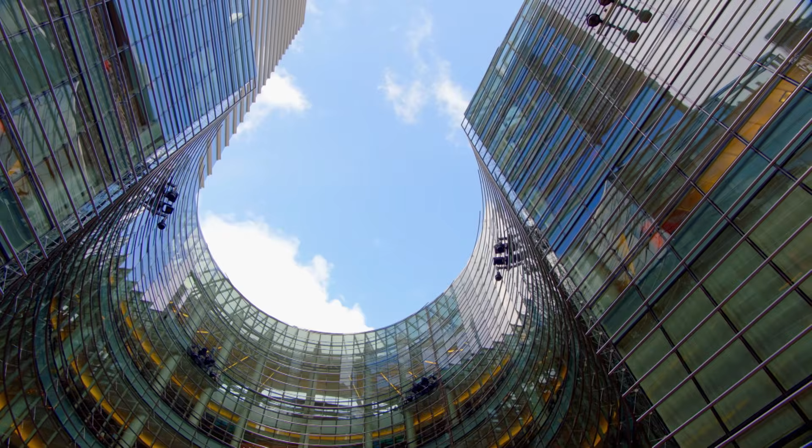As more and more skyscrapers, office and residential, come to dominate our cities, ultimately, what will this mean for our future? I think the skyscraper makes sense in the future of the city because it does use land efficiently. And that's a more sustainable way to live on the land. It's a smarter way to build a future city that consumes less energy, that accommodates the lifestyle amenities for many more people than if we have to spread out.

Tall buildings are a huge part of the answer to the challenges that face us today: social, economic, climate change, urbanization, population growth. But they are only several baby steps along the path they need to tread to truly deliver on that potential. The buildings need to do the very best that they can do if we want to carry on living on this planet.